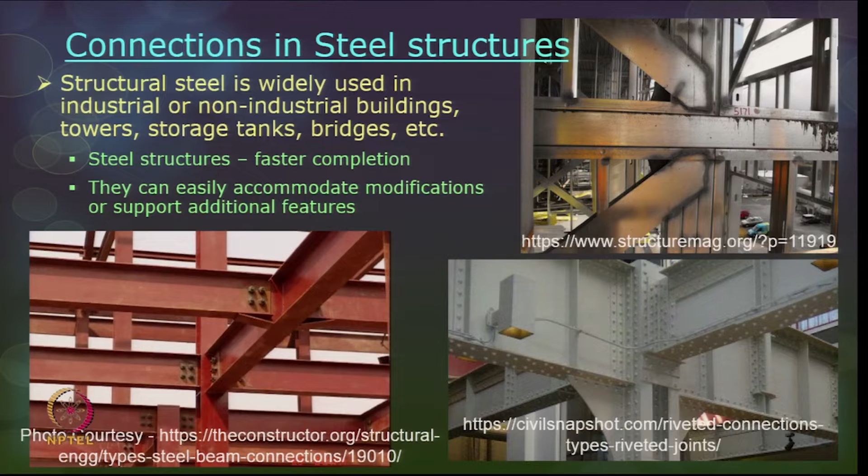So now let us begin the class. Connections in structures - there are primarily three types: rivet, welds and bolted joints. Steel structure is used very widely in industrial, non-industrial buildings, towers, storage tanks and bridges, because it is very fast to complete. It has a lot of strength and durability compared to a concrete structure. They can easily accommodate modifications also to support additional features. These are the major issues for which steel is predominantly used.

Safety in reinforcement work - there are so many issues. For example, you may do pre-stressing and post-stressing operations, wherein the reinforcement rods are actually strengthened using a pre-stressing jack. So there the primary hazard is snapping of wires. I am not discussing all the hazards with regard to steel, but a few issues I am just bringing in, and primarily we will move on to welding operations only.

Flying rods is one of the other major hazards, especially when you do shear cuts from the shearing machine. These broken wires can fly at a terrific speed and can pierce through any person standing in the travel path. So you can always have a stout shield behind the pre-stressing jack, so that the rods are not flying and they are safely collected.

So the major hazard with reinforcement is abrasion and impalement. Abrasion is nothing but scratching, primarily when you are handling the reinforcement while touching it with your bare body. The surface of the reinforcement is not that smooth, so you may have some scratches or minor cuts, injuries and so on, which we generally call an abrasion injury. And the other one is impalement.

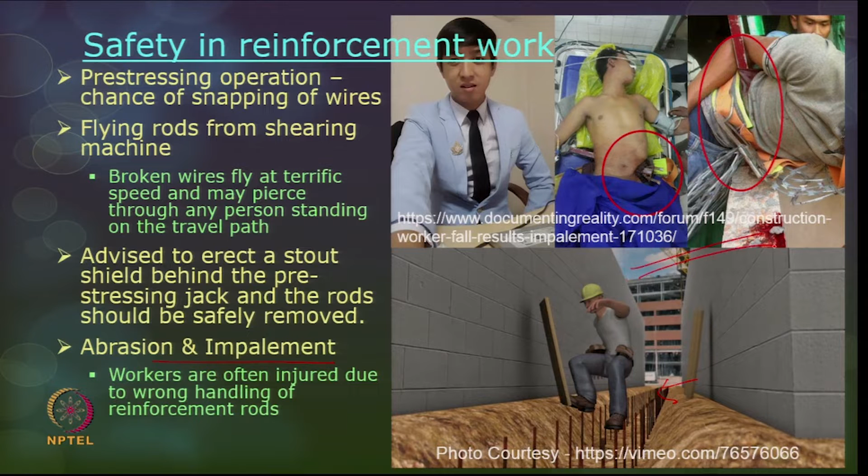This picture will tell you what is an impalement. Accidentally you may fall into the reinforcement setups and have an impalement. You can see here there are a lot of injuries workers have suffered in the past due to impalement hazards. What are the ways to avoid the impalement?

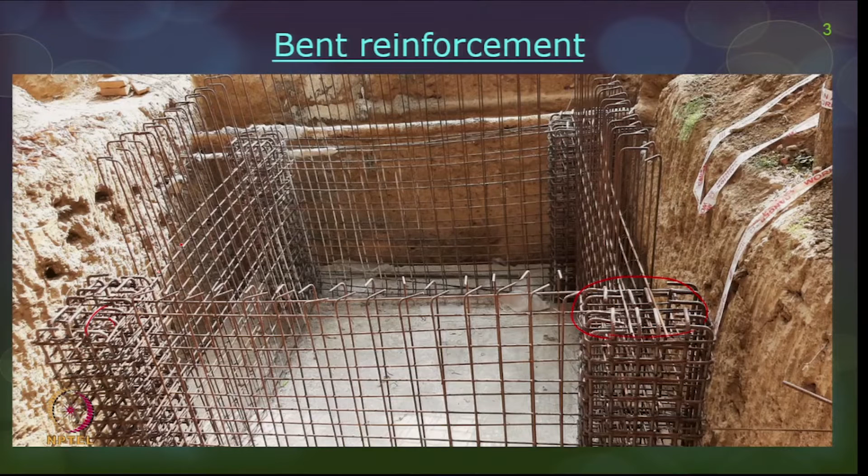A simple suggestion is to try to keep bends in all the sharp corners. This is primarily a safe photograph for reinforcement. Even if some worker has fallen in, they will not have any impalement injury. Impalement is piercing of the reinforcement rod into the worker's body. So primarily, all the reinforcement are bent here, so that there is no fall hazard and no injury with regard to impalement.

That is a safer way to do it at sites. Other method is providing an anti-impalement cap. Bend all the exposed rebar so that the ends are not upright - it is a natural way of protection.

Otherwise, you can also guard all the protruding ends of the steel reinforcement bars either by using caps or by using troughs. Caps again have two types, one is your mushroom cap or scratch caps, and the other one is a square rebar cap, which comes with a square flat base. So these are all mushroom caps and this is primarily a square cap. And suppose if there are too many reinforcements and providing all these caps is not practically feasible, you can also set up wooden troughs like this.

This is also one of the viable methods. Collect all the reinforcements together and put a wooden trough so that even if a fall hazard happens, the worker is not injured too much. Sometimes, even if you try to cap all these reinforcement rods, the weight of the fall causes the caps to get displaced or pushed inside. So it's better to choose a wooden trough, that is also one of the feasible methods to do.

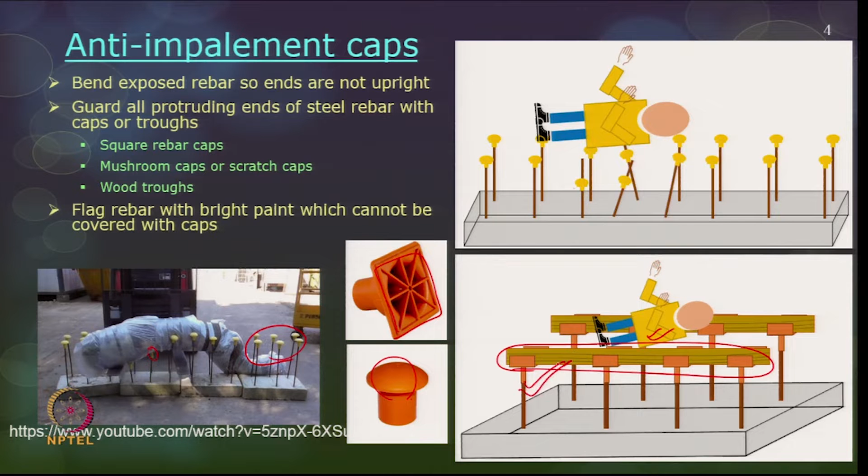Sometimes you may not be able to do any of these methods and your site is such that none of these methods will work out. Then the least preferred option is to paint them in a bright color so that it is visible from a distance that there is a fall hazard with regard to reinforcements, so that you can still make the workers aware of it.

Now, the major hazard with regard to steel is primarily gas cutting and welding operations. Let us discuss primarily on gas cutting and welding of mild steel plates and sections. This we call oxyacetylene flame cutting and welding operations. These operations by oxyacetylene flame start at 3000 degrees or so.

So it is a very hot place, and with such heat, the two metals generally join together and become like one. Now, the two gases generally used are oxygen and acetylene. Here you can see the acetylene cylinder and the oxygen cylinder. Oxygen is generally colorless, odorless and non-inflammable, while acetylene gas forms an explosive mixture when it comes in contact with air, which is rich in oxygen. This is how the setup looks like.

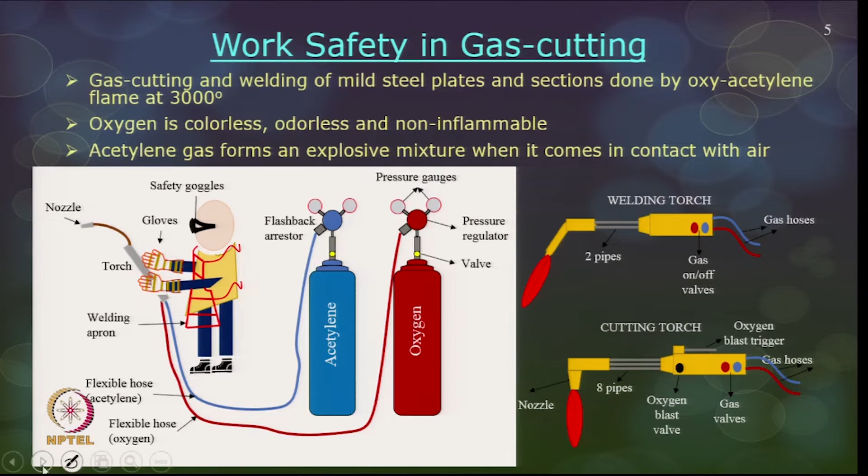Let us discuss more about this. These welding operation sites we call hot work areas, because anywhere there may be fire which can fly away and catch when it falls on combustible or flammable material, it can catch fire very soon. So these are primarily called hot work areas, and whenever you have to do work related to this, you may have to get a hot work permit system, which we also call PTW, permit to work system. So this is HWP, hot work permit system.

OSHA defines hot work as any work involving electric or gas welding, cutting, brazing, or similar flame or spark producing operations. During hot work, sparks can fly literally and spread over a large area because of the heat and temperature, maybe in a closed cabin, so it is very, very dangerous. Sparks start flying and moving away, making it impossible for grinders or welders, the operators performing this operation, to really concentrate on their welding work and also look out for fires.

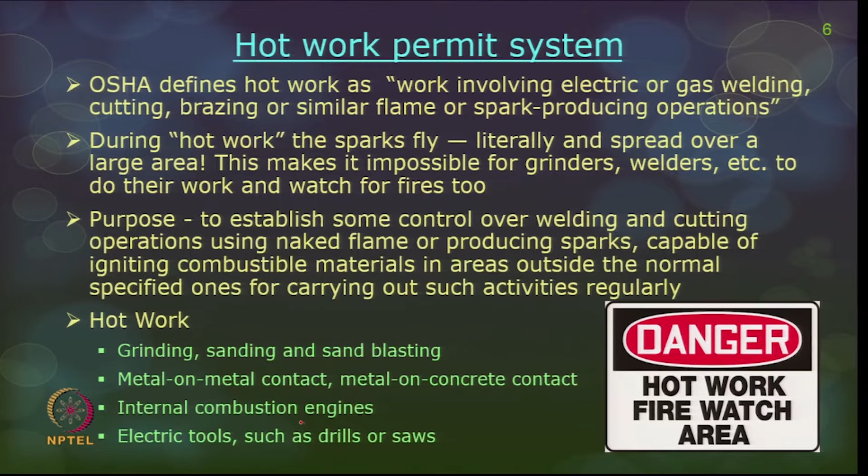That is why we have to have a hot work permit system. Its purpose is to establish control on welding and cutting operations using naked flame or producing sparks capable of igniting combustible material in the surrounding areas when the work is going on. Some examples of hot work include grinding, sanding or sandblasting, metal on metal contact, metal on concrete contact, internal combustion engines, and electric tools such as drills or saws.

Now let us discuss about safety of men, then move on to general safety precautions. What are the special qualifications required for operators? These operators of cutting and welding equipment should be only skilled workers, physically fit. Why physically fit? Because every time he should be safety conscious and have presence of mind when on the job, with regard to any changing circumstance or hazard, he should have the presence of mind to put off the fire and escape from the vicinity.

Welders and gas cutters should be equipped with proper PPE, such as gloves, safety boots, aprons, hand shields, proper safety helmet and so on. Safety goggles should be used for duties hazardous to eyes, for example drilling, cutting or welding, accordingly fitted with proper lens and filtering lens as well. The clothing should be free from oil or grease, because it can easily catch fire, and it should not have open pockets or trouser flaps and so on.

The cutting or welding operators should not work alone or in any area which is very close to a hazardous location, such as where flammable materials are stored. Welding operations should not be carried out in those places.

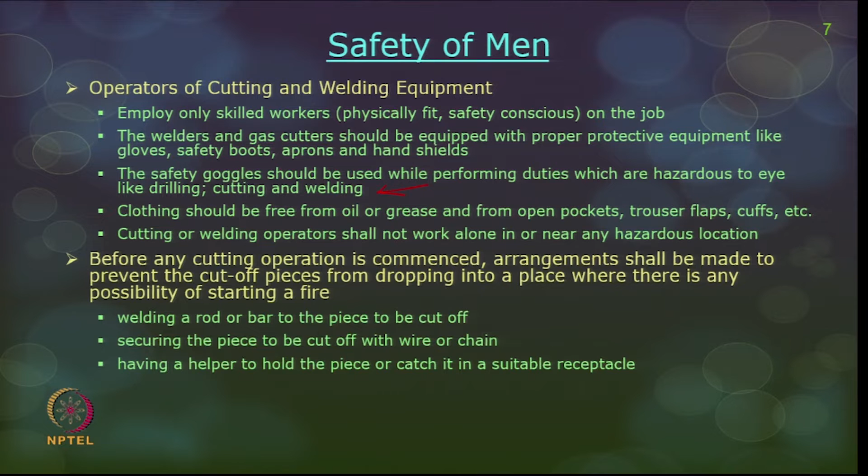Welding a rod or bar to the piece to be cut off, securing the piece with wire or a chain, or having a helper hold the piece as soon as you start cutting it off. So these are the three options you have primarily.

So PPE starts from the welding helmet, a flame proof skull cap, and eye safety shield. Primarily we call it a welder's helmet. It comes with a protective filter and an opaque shell. Then eye safety shields, this is what it is.

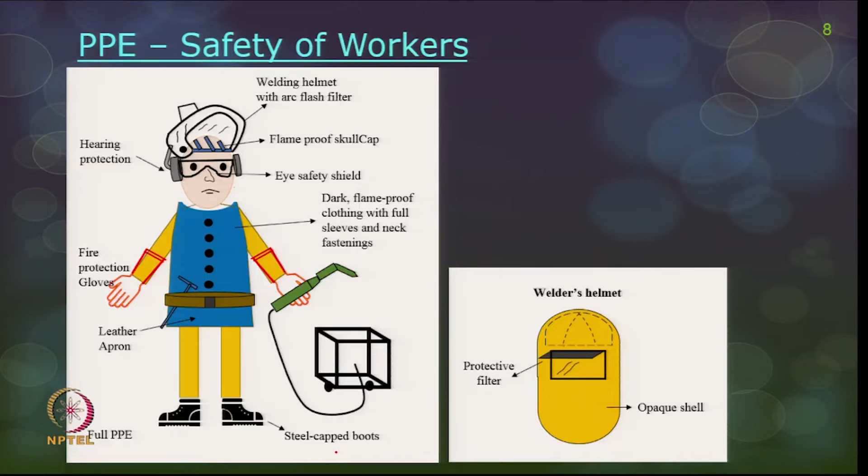Then dark flame proof clothing with full sleeves and neck fastenings, a leather apron on top of that, fire protection gloves, and full steel capped boots. These are the basic requirements of PPE, and the hot work permit system will not allow workers to enter if they do not wear any of these PPE.

Now general precautions before welding and cutting operations: protective seat for the operator. Most often these operators try to sit or kneel, or use an empty kerosene tank or any other tank available in the vicinity as a seat. Always keep in mind, those bins are not at all a seat.

Wet floors or floors covered with metallic sheets can always give electric shock, so you have to be very careful. Spillover of oil, grease, or dirt on the floor can also ignite fire, so you should be very careful. Clean the floor away from oil, grease, dirt, hot metal droplets, and hot metal pieces, all should be cleaned from time to time.

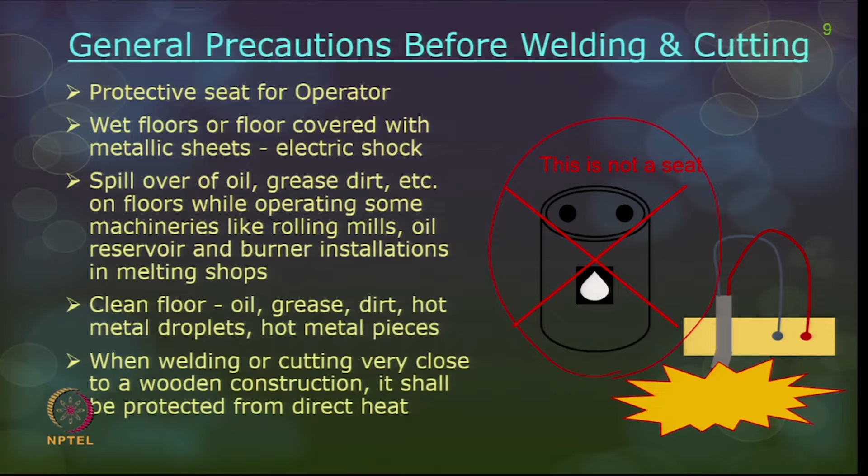When welding or cutting is very close to a wooden construction, it shall be protected from direct heat, because that is also a combustible material. Now, work safety in gas cutting.

Your oxygen cylinder and acetylene cylinder should be stored separately, they should never be stored together, and the gas cylinders should preferably be carried from the store to the place of work using trolleys or other suitable means, maybe even cranes. It should be ensured these cylinders are chained, all valves are shut, regulators are detached, and there is no leakage before being taken off.

Suppose if there is no separate place and they have to be stored together, then there should be at least a 5-foot barrier in between these two storage places.

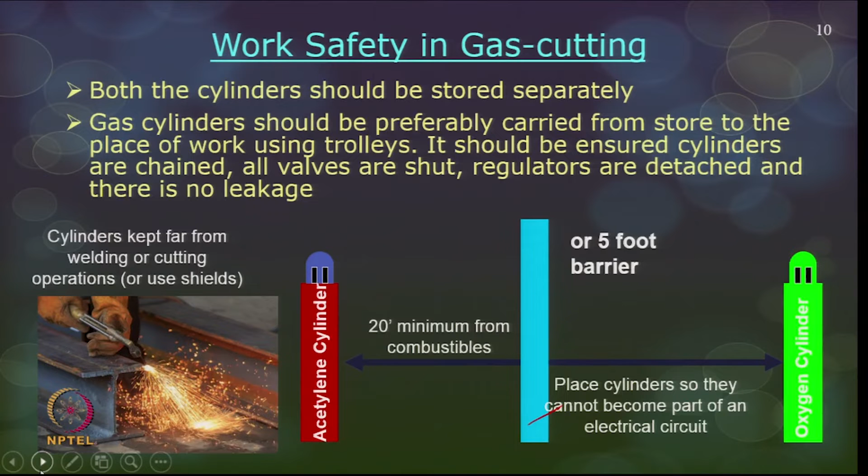Cylinders should be kept away from welding or cutting operations, or shields should be used, then only the operations should carry on, and these cylinders should be placed so that they will not become part of the electrical circuit.

While transporting, you should maintain all safety precautions with regard to the cylinders. The cylinders should be chained properly, sealed, and always carried in a vertical position.

Operators should note all apparatus will have the proper distinction mark. Generally they have a color code: red is primarily for acetylene and black or green is generally for oxygen, and they should follow those color codes for identifying, even along with the hoses.

To start the gas cutting job, the acetylene controller should first slightly open the flame to check for any blocks in the nozzle and see how the flame is coming out. He should separately open both hoses, and then only open the flames together for the torch cutting.

First the acetylene flame should be opened, which may give a black smoke at the end, but it is still always safe to open the acetylene flame first and then open the oxygen flame next. Always ensure you have the nozzle and the tip positioned properly before the flame should start, especially when igniting, because if you allow the fire to happen too close to the nozzle, there can be chances of backfire.

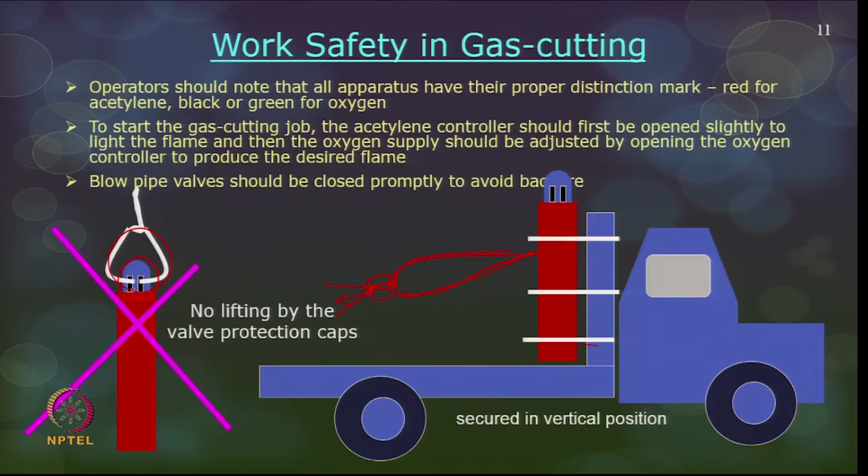No lifting by the valve protection caps. Generally, do not handle cylinders with the help of the caps; that is not the way to do it. It has to be chained with some mechanism and then lifted up. For example, this is the way to lift it, not by the cap.

Especially when hoisting cylinders and securing them in a cradle and transporting them, use a cylinder truck to keep cylinders from being knocked over, and while in use they should always be properly sealed and kept. Cylinders should also be secured in an upright position at all times, not slanting or horizontal. Valve protection caps should always be in place and should never be opened at any time.

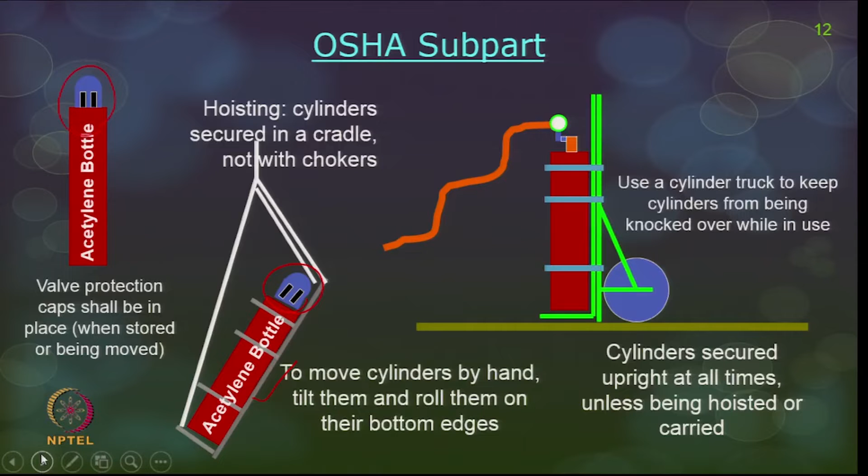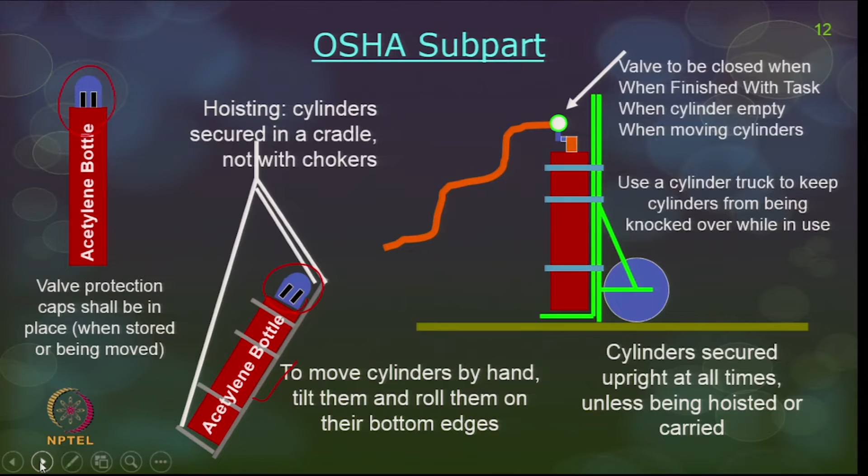To move cylinders by hand, tilt them and roll them on their bottom edges. Valves have to be closed when you are finished with the task, when the cylinder is empty, and when you are moving the cylinders - at all these instances the valve has to be closed.

General safety precautions: all gas cylinders shall be used and stored in the upright position only and should be conveyed in trolleys or other suitable means. While handling with cranes, they should be carried in cages, and the cylinders should be marked as full or empty, so that operators are aware of the hazard linked with those cylinders.

Gas cylinders should be stored away from open flames and other sources of heat. Oxygen cylinders should never be stored near gas, oil, grease and other similar combustible materials.

When cylinders are in use, the cylinder valve key or wrench should be placed in position, and when the cylinder is moved, the valve should always be closed. All cylinder valves should be closed when torches are being replaced or welding is stopped for any reason, and never lubricate the cap when trying to open it.

Before starting the operation, if there is any spill of oil or grease on the cylinder, it should be wiped off clean, and only then should the valves be opened. Gas cutting and welding torches should be lighted by means of special lighters, not with a matchbox and matchsticks.

Cables from welding equipment should be placed so that they are not run over by traffic, and immediately after the operation they should be properly secured. Double earthing is also recommended to prevent electric shocks.

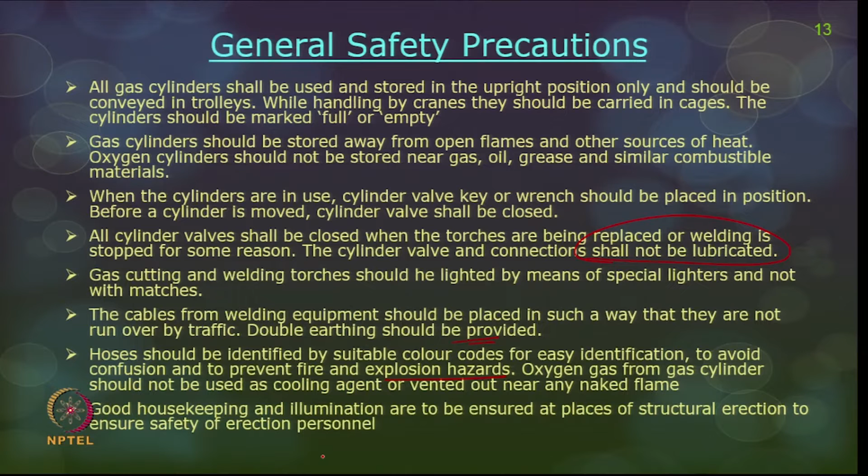The hoses should have proper color codes, known to the operator, for easy handling, to avoid confusion and prevent fire and explosion hazards. Oxygen gas from the gas cylinder should not be used as a cooling agent or vented out near any naked flames. Good housekeeping and illumination should be ensured to prevent any fire mishaps at the site.

In operating oxy-fuel gas cutting apparatus, the oxygen pressure should be set appropriately to the correct level and you should never try to overdo these setups. An oxygen pressure greater than necessary will always generate a lot of sparks, which is really dangerous and can catch fire.

If the welders and assistants are not adequately trained, or are not able to be watchful in terms of handling small fires - what we call watch fires - then there should be proper additional help or a firefighting service present, so they are able to identify and detect fire, signal other people properly, and take immediate action to extinguish the fire.

Now, what is backfire and flashback? Backfire is the return of the flame into the blowpipe with a loud or violent pop sound. So primarily, this is your nozzle, with a nozzle tip, and the flame coming out here, and you have the two hoses. This flame starts entering inside - that is primarily called backfire.

Flashback is much more severe and potentially dangerous. Here the flame returns through the blowpipe into the hose, and it even moves to the cylinders and regulators. If the operator is really watchful of the flashback, he knows how to operate the regulators and prevent it from happening, and primarily he can stop an explosion from occurring.

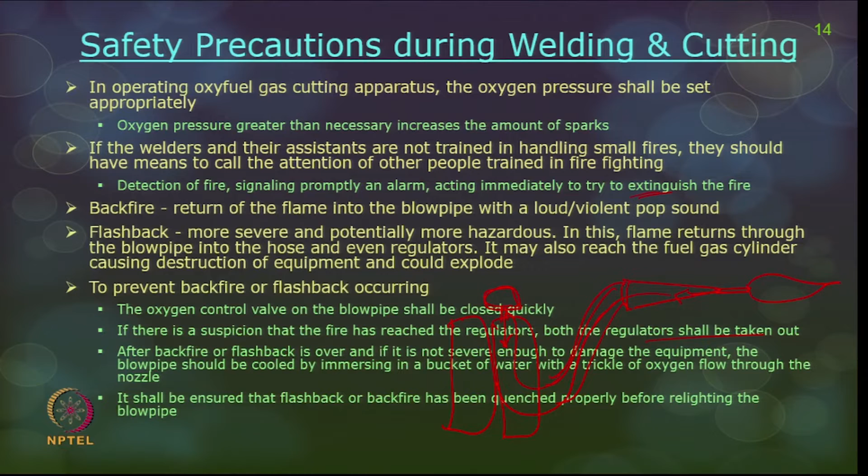Some more precautions. The main reason is feeding of high pressure gas into the low pressure line, forming a highly combustible mixture through which the flame can propagate at a very high speed. This can happen due to several reasons, such as the nozzle being partially blocked, control valves not fully closed or leaking, incorrect pressure settings, overheating of the blowpipe, and so on.

Whenever the nozzles are damaged or defective, they should not be used. When working on heavily scaled material, the surface has to be cleaned prior to welding and or cutting to prevent scales flying off and blocking the tip nozzle. Always, before you start the operation, you have to blow off both the pipes one after the other to check for the flow of air coming out. Only when you identify that there is nothing blocking the nozzle and the hose are you supposed to start the welding operation.

Additionally, even after all these precautions, fire may still happen. So in case of fire, you may have to have sufficient firefighting apparatus and equipment so that you are actually putting off the fire. Ample supply of dry sand in suitable containers should be placed. Hoses connected to an effective water supply should also be available so that you can put off the fire. All persons concerned should be instructed and trained wherever necessary in using efficiently all the equipment and devices, starting from firefighting and other devices.

Signaling of fire alarm: the first impulse of many individuals on discovering a fire is to try to extinguish it. If you are not trying to extinguish it, you are supposed to inform without any delay, through an alarm system, all persons inside the site that a fire has broken out.

The fire protection procedure should be set up if there is to be flame cutting, burning, heating, forging, riveting, or other operations that could start a fire. The worker should be instructed not to throw loose objects or scrap like hot rivets, cigarette stubs, etc. around, which are primary substances for igniting fire. Wherever possible, non-combustible material should be used for false work, storing, or temporary construction. Inflammable materials like petrol, kerosene, or liquid oxygen should be stored with proper care.

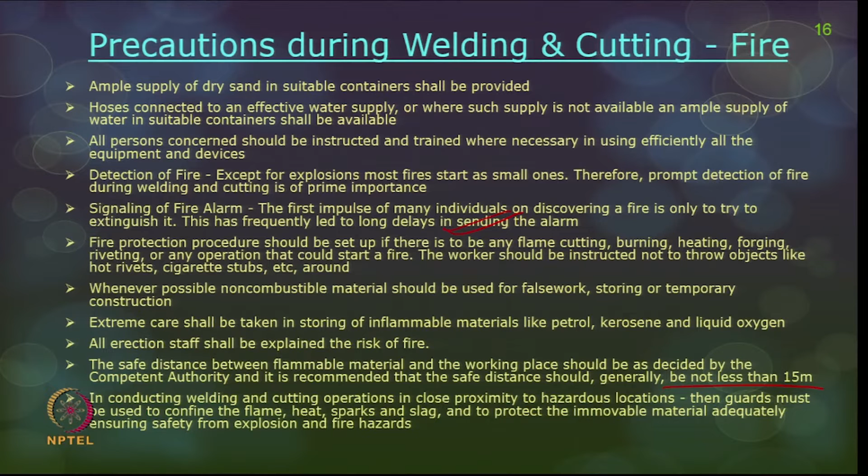All erection staff, primarily in steel erection since we are discussing steel, should be explained the risk of fire. The safe distance between flammable material and the working place should be decided by the competent authority, and generally the safe distance is not less than 15 meters. When conducting welding and cutting operations, especially close to hazardous locations, try to barricade or guard those hazards, and put up a thick fire shield before starting your operations.

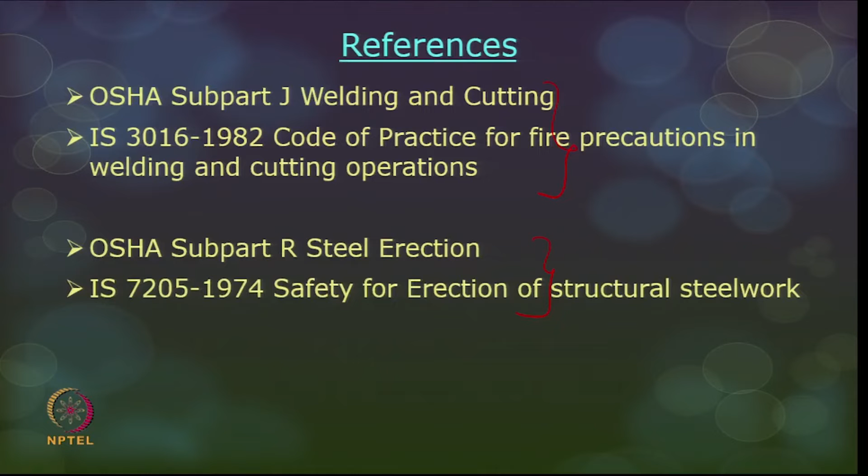This content was taken from these references, which are primarily for fire precautions in cutting and welding, and general references for steel erection, including crane operations, fall hazards, and so on. With this, the topic on steel and welding operations is over. We will continue with fire hazard. So, what is a fire?

So far we have discussed fire can happen. Even in electrical safety we discussed fire is one of the hazards, and in your steel welding and cutting operations there also fire is a major hazard. So what is this fire and how to take care of it?

If you look at all the disasters known so far, like flood, hurricanes or typhoons, earthquake and so on, all these are considered as natural hazards. The only man-made hazard is what we call fire. Fire does not happen naturally, and when three things are generally put together, fire always happens. So what are the three things?

The three things are fuel, oxygen and heat. Primarily you need heat, a hot medium, for the fire to be ignited. You also need some supply of fuel, which can come in any form, and you need oxygen, primarily the air. So when these come together, it will ignite a fire immediately.

There are so many types of fire classification: A, B, C, D, F and K. A is primarily ordinary combustibles like wood, paper, cloth and so on. B is flammable liquids, grease, oil, paint, solvents, etc. C is live electrical equipment, electrical panels, motors, wiring and so on.

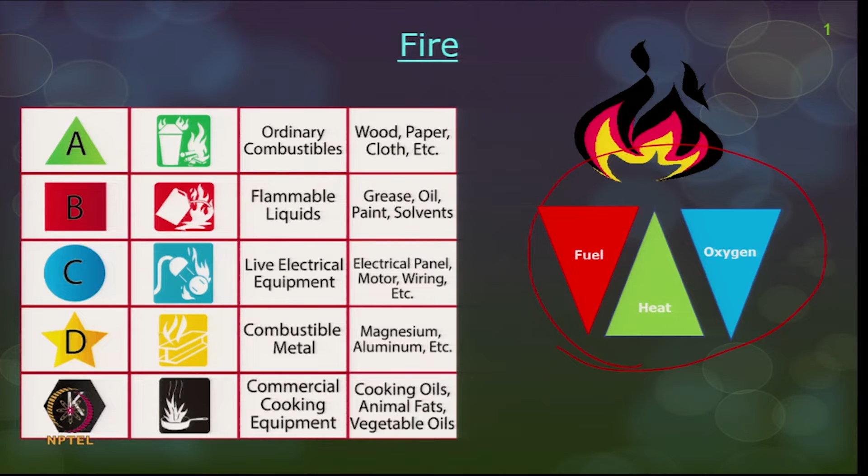D is combustible metal, magnesium, aluminum and so on. And the last one is commercial cooking equipment - all your cooking oil, animal fats and vegetable oils fall under this category. Now, when you want to make efforts in putting out the fire, the easiest means is to try to cut off any one of the three sources.

Only when the three sources come together can fire easily happen. So if you want to put off the fire or prevent it from occurring, you have to either stay away from oxygen - in the sense, do not give any supply of oxygen, which we call the starvation process - or do not allow heat to accumulate in a place, so that fire will not happen. So try to take off one of the sources, so that fire generally does not occur.

How do we do this? If you look at fire safety, many completed buildings, hotels or constructions generally follow all fire safety norms, and you will see a lot of fire safety norms available for completed construction. But you will find very little material on fire hazard, especially when it comes to an ongoing construction.

So if you see a new building, assessment includes not only the location of the structure, but also the other buildings which are in close proximity to the structure you are building. So the easy way is to avoid one of the three sources to prevent a fire. Now let us discuss one after the other.

Ignition: look for possible sources of heat that could get hot enough to ignite material found at the site. For example, naked flame, plant and equipment fuel, vehicle exhaust, electrical - faulty or misused electrical equipment, poor electrical installations, or heating from bunched or damaged cables, hot work and so on. These are all sources of ignition which can actually ignite a fire, so there is probably a source of ignition there.

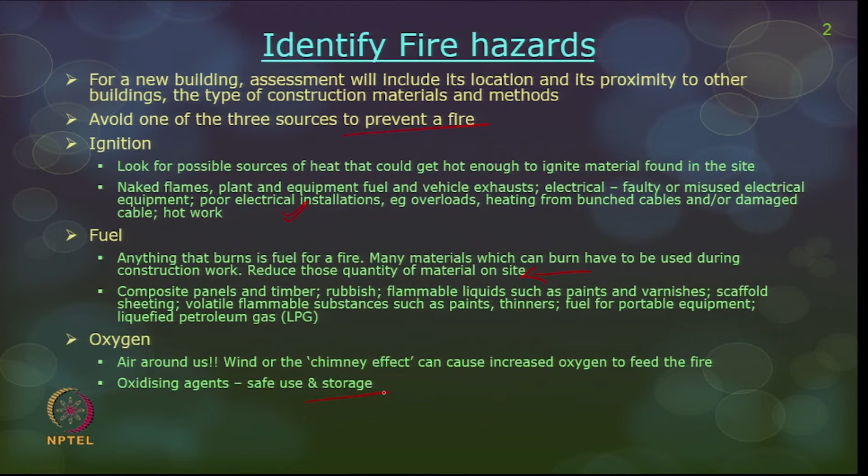So how do we reduce the risk of fire? Avoid storing substances that can cause fire wherever people are gathering. Suppose the construction site in a particular locality has more people gathering - you have to keep an alternate storage for all your oxidizing agents, flammable substances and so on. So you have to plan your site accordingly. The way the site is managed may affect the precautions you need to put in place, so you may also have to think of fire precautions well in advance.

Sometimes you may also have to think of fire precautions while designing itself. Designers have to specify permanent fire protection such as stair enclosures should be constructed as early as possible, so that it can serve as a means of escape while constructing the building. Best suggestion is to put permanent stairs well in advance, so that you can avoid all falls from scaffolds, and also use it as an escape route in case of fire.

Generally these fire mitigation methods are installed once the building is constructed. If as and when possible, installing fire mitigation methods like fire detectors and fire suppression systems will reduce the risk of fire. So ensure any action you take in terms of reducing the fire hazard should not substitute or aggravate another hazard.

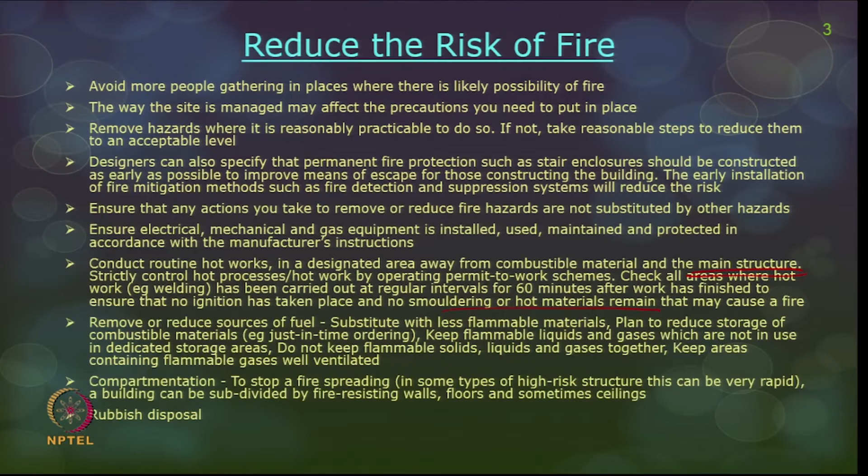Other one is rubbish disposal. Small, frequent clearances of rubbish from the site can also prevent fire. For example, dust or scrap from timber, especially during carpentry work, can be more combustible than the timber itself. You have to understand that scrap or debris from either a demolition site or new construction is primarily a source for fire to catch fast. So plan to throw off scrap away from the site daily, so you do not give a chance for fire to happen.

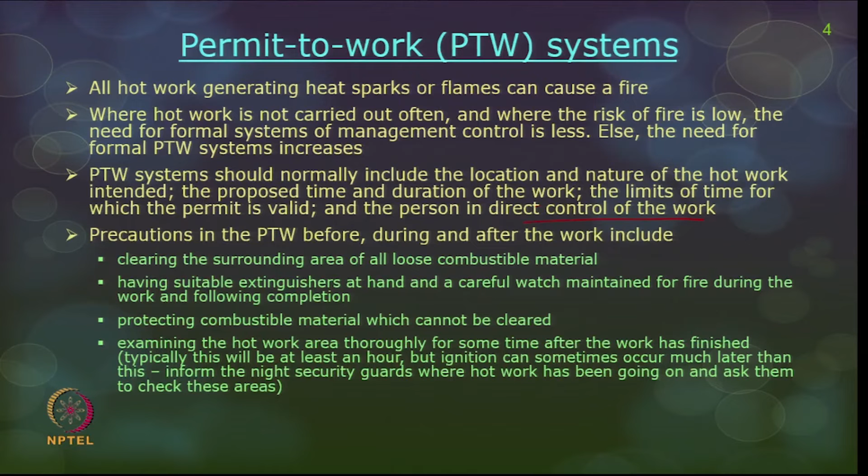Reducing potential fuel sources: primarily flammable and combustible materials should be stored separately. Do not try to store too much material on an ongoing construction site, as dangerous substances can put people's lives at risk from fire and explosion. The amount of material kept on site which can burn should be minimized. Just-in-time delivery meets this purpose, so order goods required for that particular 2 or 3 days in advance only, and do not store too much material.

Construction work can alter the flammability of substances, and if storage outside the structure is not possible, internal storage should be maintained. For internal storage, you need a partition wall with at least 30 minutes of fire resistance. Good quality plaster board will usually achieve this and works well for constructing small internal stores. The storage should have a door which is fire resisting and self-closing. Good ventilation must be ensured, and openings for storage places should be 1% of total floor and wall area when storing flammable liquids.

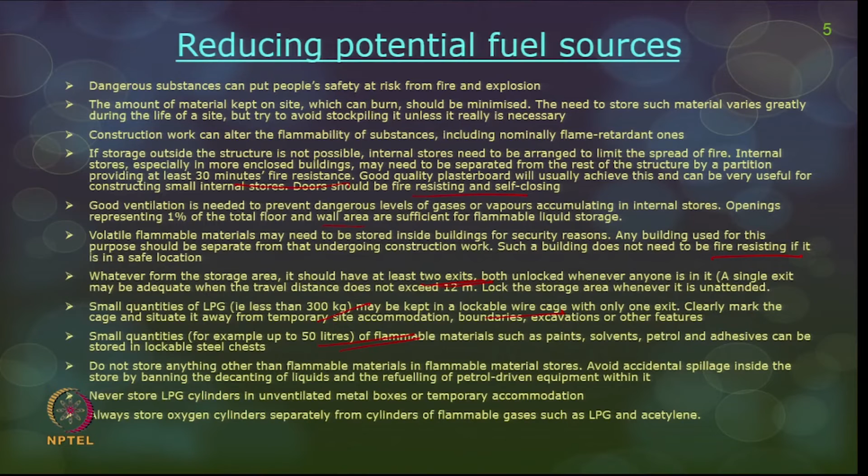These are primarily precautions. Now, in case fire happens, how do we put off the fire, and first of all, how do we detect a fire? That is the number one issue here, so we have to discuss fire detectors and fire extinguishers.

Fire detectors are generally not that prominently seen on an ongoing construction site, or in any new construction. The aim of any fire warning system is to ensure people on the site are safe and able to escape, because fire is a life-threatening issue. Essential requirements of a fire warning signal are that it is distinctive, clearly audible, and recognized by all people on the site. In a very small open site, word of mouth generally serves as an alarm system. In the majority of sites, they have a slightly upgraded system of fire alarms, which is primarily a walkie-talkie sort of system or a wired-in system to give sounders or signals or call points that fire has occurred, so people have to evacuate the room.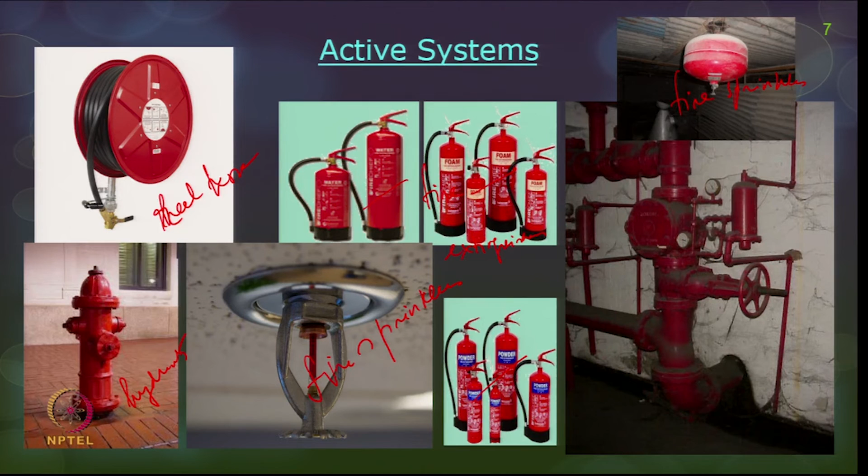Based on the classification of the fire, you can use water, foam, or powder for putting off the fire. There are a lot of ways of doing this. These are primarily a quick way of putting off the fire, which we call an active system. The next one is the passive system.

Passive systems generally try to seal off the fire without spreading it. An active system will not try to suppress the fire, but just puts it off through a forced mechanism. In passive systems, it tries to conceal or seal.

So there are many ways here. Number one is the fire door. This is primarily used for an exit, but it also seals the fire inside the particular room itself. This is called smoke curtains.

The minute the fire happens, either by manual or automatic means, sensors can smell the smoke and try to put it off and seal the complete building, so that the smoke or fire is not transferred outside.

This is moldable putty, these are the sealants available for putting off the fire, and this is primarily a fire retardant paint. One case I can discuss is where fire can be easily prevented by using these putties.

There was an incident which happened 5-6 years back in one of the regions in Delhi. The fire spread through the complete building because there were a lot of service lines which were not sealed completely. These service lines are generally sealed only after the building is completely constructed. During construction, normally construction companies do not emphasize sealing these holes.

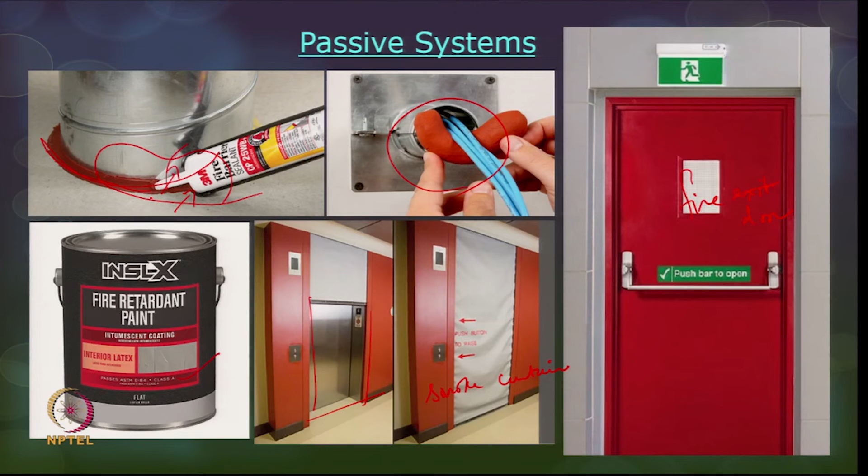Through these holes, the smoke and other air starts coming out, and it starts spreading from room to room, floor to floor, and the fire spreads very easily. If you put in a moldable putty, or even mortar, it is a very good way of sealing the smoke inside a room. Only that particular room may get damaged, but it does not spread to other rooms and neighboring places.

The other setups are fire pump rooms. This is primarily a metro construction site where they even have mobile fire extinguishers in place, which is helpful for putting off the fire.

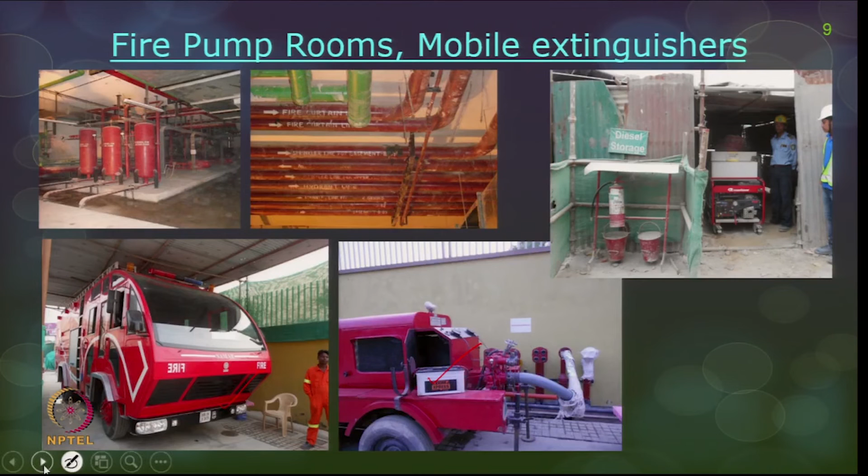Underground excavations are more prone to fire because they may have flammable gases, toxic gases and so on. So you may have to have a well set up proper setup for putting off the fire. They even have a mobile fire extinguisher van in underground sites.

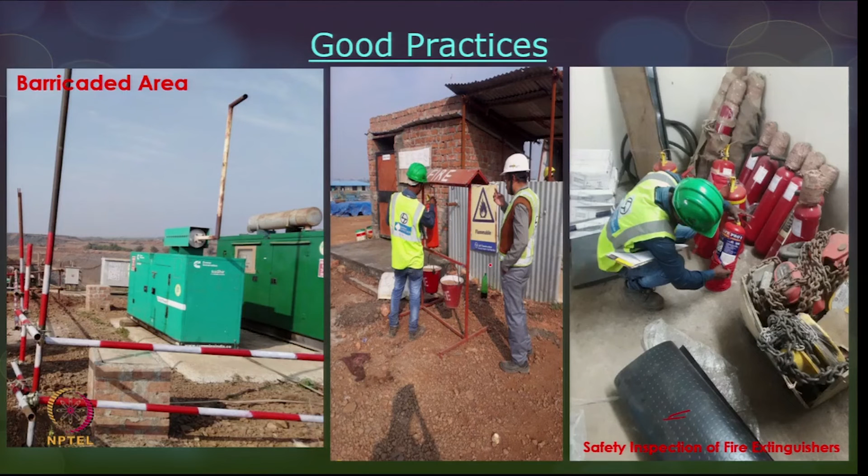This is some of the good practices. Wherever you see places more susceptible to fire, they are all barricaded and not allowed for people to enter. This is primarily inspection of fire extinguishers happening. All these flammable materials are stored in a godown and kept safely away from the ongoing construction site. Emergency plans.

The other issue is you may also have to think of safeguarding the people, apart from putting off the fire. So emergency escape plans that we have to discuss. Before even you think of fire suppression, you may have to think of emergency plans.

Suppose if you are thinking of evacuating people through scaffolds, you should not be thinking of timber planks for the scaffold. You should have a material which is really fire resistant. All this has to be kept in mind. That is where, while designing itself, you should be putting in your fire safety measures from that point of time.

This is primarily a site where they use scaffolds and permanent stairs as a means of emergency escape mechanism, and these stairs and other means also had a lot of sprinklers, so that the fire can be easily put off.

So the plan, even this emergency plan, should be based on the outcome of fire risk assessment - what is the choice of material, what type of structure is going on. All this matters, and it should be available to the workers, contractors, subcontractors and anyone involved in the project.

This emergency plan should be made available before the work starts, and any control measures identified should be integrated with other work procedures, for example scaffolds, electrical work, welding work and so on, so that it is all well linked together, and any measure you take today may not work out later on.

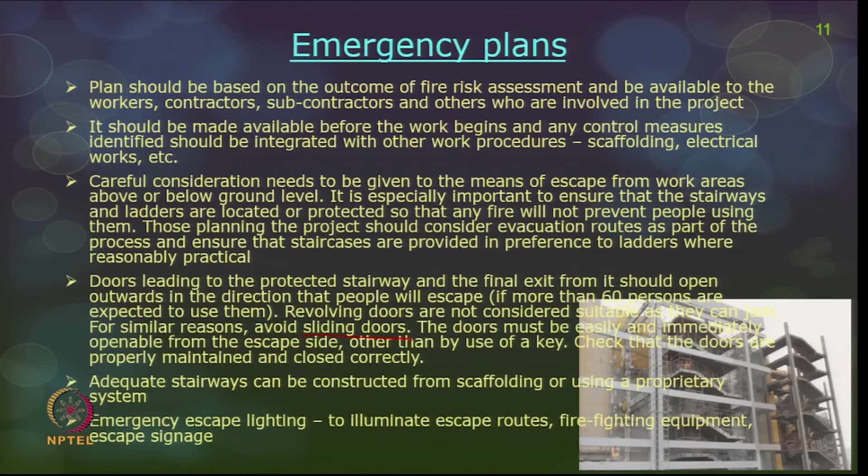Adequate stairways should be constructed from scaffolds or using a proprietary system, so you have to have a proper means of thinking on that. If these issues happen in the dark, emergency escape lights also have to be provided in addition to these precautions for escape routes, so that people are able to escape safely.

Whenever workers are escaping, they should also be aware of all the signages, meaning routes and means of escape. There should be proper firefighting signs and evacuation signs. While discussing signs, signals and barricades, we covered all these at that point. These should be identified, and immediately after coming out of the building or escaping, workers should know where the assembly area is.

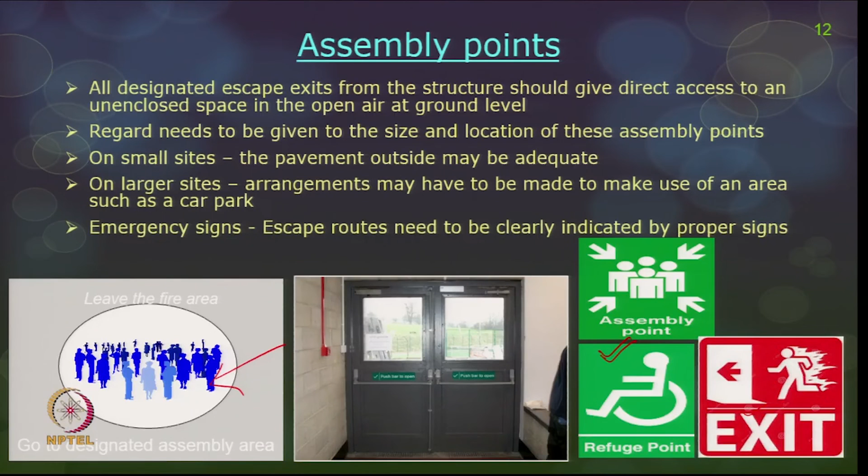Primarily it is an assembly point, and that should be identified. In small sites, a pavement outside may be adequate. If you have a very large site, arrangements have to be made, maybe in a car park, or a designated place away from the hazard where you are able to evacuate workers safely. If that area is outside the site, those gates should be open, allowing workers to quickly escape from those places. So escape routes have to be clearly marked and identified.

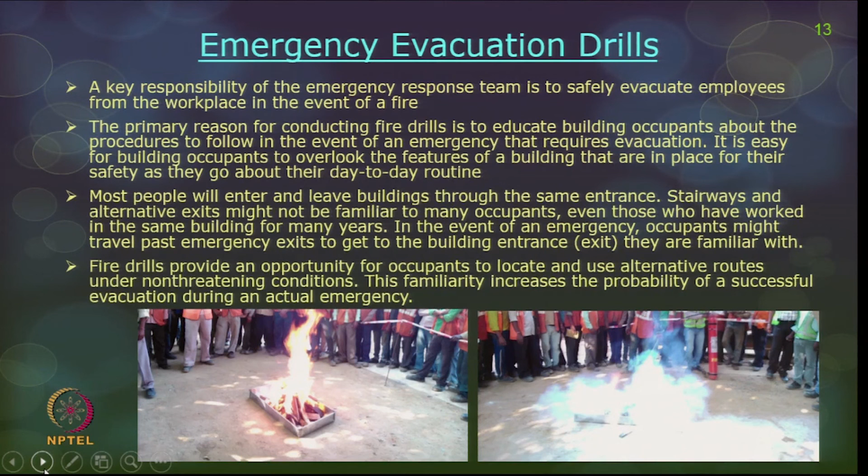Next is emergency evacuation drills. Most of the time, workers start getting panicked when some incident or hazard breaks out, especially in terms of fire. Since fire is a man-made hazard, workers should be trained on how to take care of themselves and escape from the fire hazard.

One easy way to do this is the emergency evacuation drill, which we normally call a fire drill. A fire drill happens wherein they actually create a fire and make the workers escape out and then put off the fire, so that instead of training in a theoretical form, it is actually done in a practical form.

Workers are used to entering and exiting the same structure every day, so they know how to enter and come out. So even when a hazard happens, such as fire breaking out, workers will be very clear on how to come out of the hazard and how to put off the fire. These fire drills happen depending on the site, sometimes once a month, sometimes once in six months.

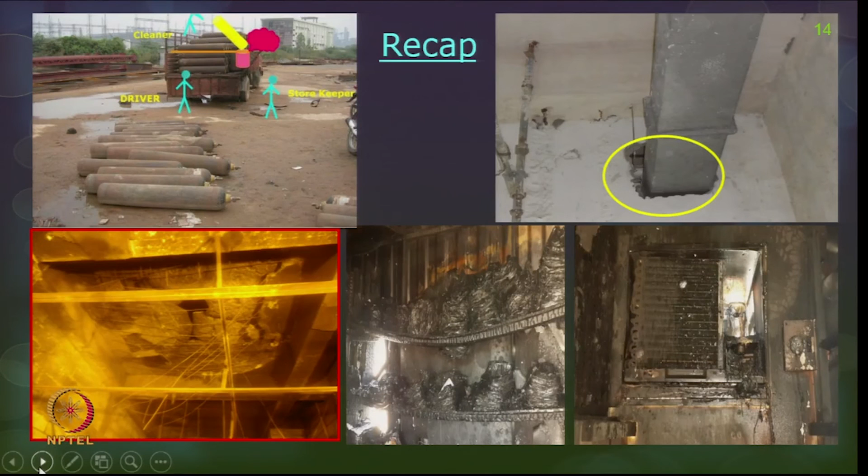To recap everything: fire is very dangerous, and although it is a man-made hazard, it is easy to think of where the hazard can exist, and you can still try to ensure that even if fire happens, it should not affect people or damage the structure. More than the lives of people, these photographs show how much damage has happened. This is primarily a godown, and the complete godown has totally gone off due to fire. This is also an ongoing construction worker shed which caught fire, and the total structure got damaged.

Primarily small issues like not properly closing the service lines or hydrants and so on can trigger off the fire. So you have to be very careful, and most of these issues are unsafe acts only. This is also an example of an unsafe act - if you see here, all the cylinders are stored in a horizontal manner, lying here and there one after the other. These are not the proper ways of storing these cylinders.